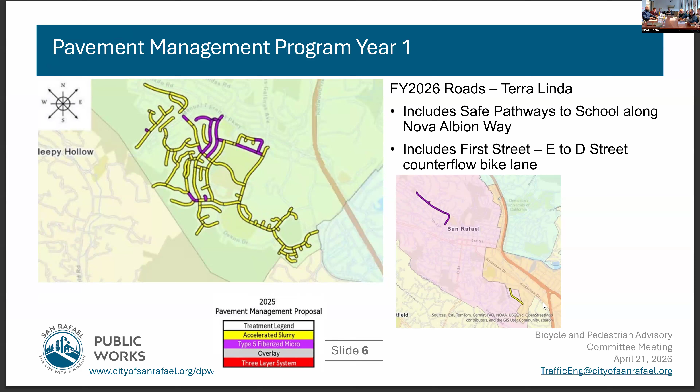So primarily in the Terra Linda area, with an accelerated slurry and a micro. It includes the Safe Pathways to School along Nova Albion. This is a grant that the city received. And then it also includes First Street, E to D, which is a counterflow bike lane, which was in the 2018 citywide bike and ped plan. So we'll go into more detail.

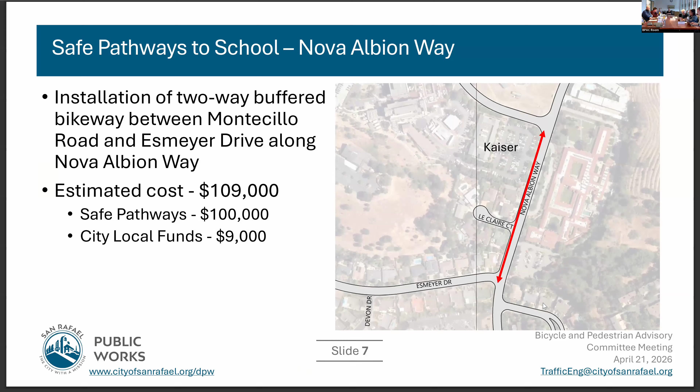So Safe Pathways to School, this is Nova Albion. So this is between Montecillo Road and Esmeyer Drive along Nova Albion Way, right by the Kaiser. Estimated construction cost is right around 109. Safe Pathways is providing $100,000 of that, and the city is matching local funds of $9,000 for construction.

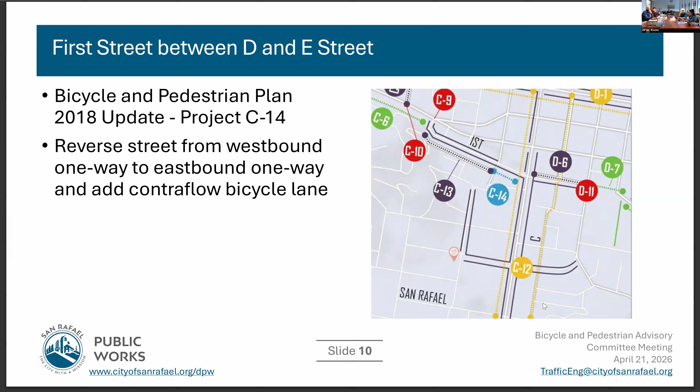And then First Street between D and E, so this is C14. Like I said, this was in the Bike and Ped Plan 2018 update. So this is looking to reverse vehicle traffic from the westbound direction to the eastbound direction towards D Street, and then adding a counterflow bike lane to head back towards E Street. So that's what this looks like, you'll see over on the right.

That is it, happy to take questions. I appreciate that. All right, so first, members, questions of staff.

I don't have any questions. No questions from me on that. Thank you, it's great. We'll open it for public comment.

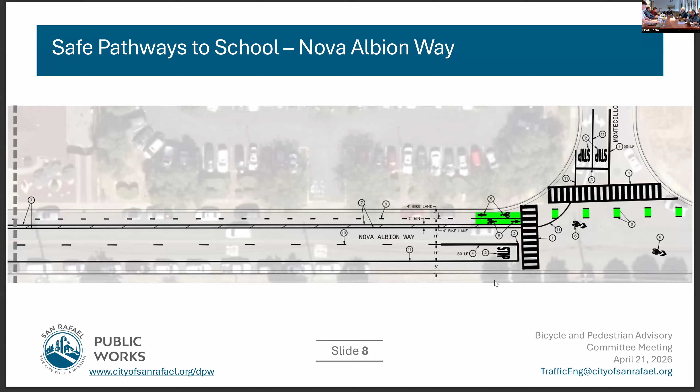And another thing - that section of First Street in the eastbound direction is also a bike route. Can it get some sharrows on the road there? They're not shown. I think there are some existing ones from when we did the paving a year ago, and they might just not be shown because they're existing. This is new striping, but we can confirm if we need to add them for the traffic.

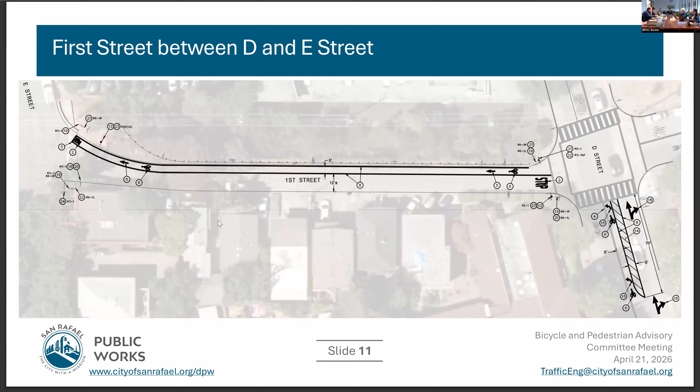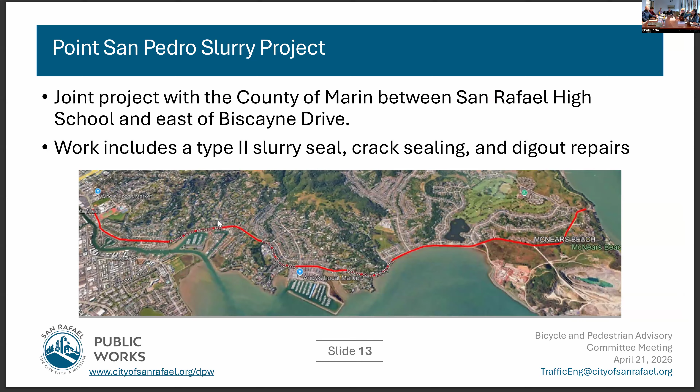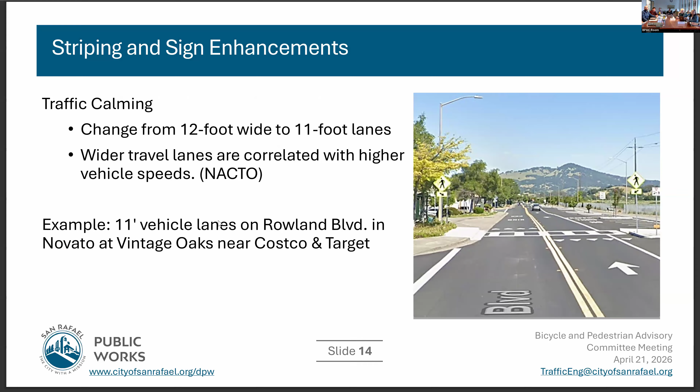Crack sealing and dig-out localized repairs, plus striping and sign enhancements, specifically traffic calming. We're looking to change the existing 12-foot wide lanes down to 11 feet wide. Wider lanes are typically correlated with faster speeds, so we're looking for some reduction there. This is just an example of 11-foot lanes on Rowland Boulevard in Novato, pretty typical, nothing out of the ordinary.

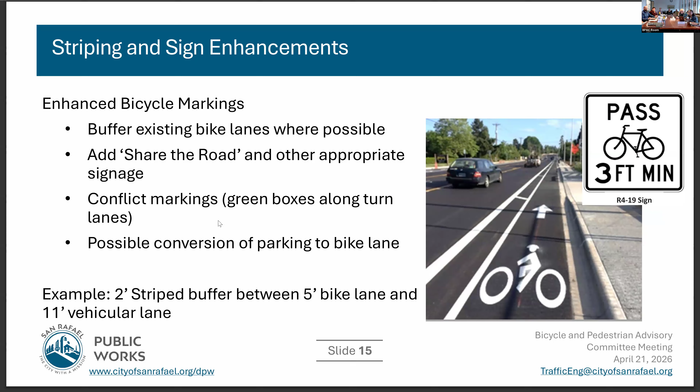And then some enhanced bicycle markings. For the existing bike lane, we're providing a buffer where possible, ranging from 2 to 3 feet currently on the 65% drawings. We're adding share-the-road signage, a minimum 3-foot pass, conflict markings when going past intersections and turn lanes, and looking at possible conversion of existing underutilized parking to a bike lane. This shows a 2-foot striped buffer, 5-foot bike lane, with an 11-foot vehicle lane next to it.

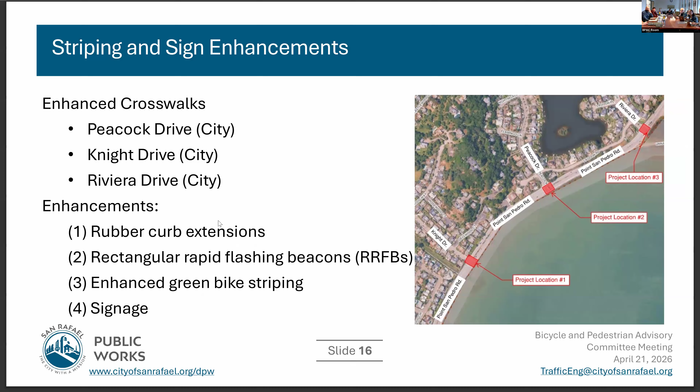We're also doing a quick build project with TDA grant funds, transportation - thank you, TDA. This is at Peacock, Knight, and Riviera. We're doing rubber curb extensions, RRFBs - rectangular rapid flashing beacons - some green bike striping, and additional signage. This first one is Knight Drive at Point San Pedro: rubber curbs to help align the existing curb ramps, enhanced striping for pedestrians, and rectangular rapid flashing beacons on the north, median, and south. These flash when the button is pressed and turn off when it's no longer pressed, plus bike lane conflict markings - the green - through the intersections.

Similar treatments at Peacock Drive, all aligned with the same goal: slow speeds and draw attention to pedestrians making crossings. We're also bringing back some shark-teeth yield crossings to help warn drivers. Riviera gets similar treatments as well, with lanes narrowed from 12 to 11 feet. These are all 65% drawings, so we're looking for feedback from all of you.

May I ask you a question specifically about those, or do you want to get to where it's all done? This is my last slide. Okay, great, we'll get to it.

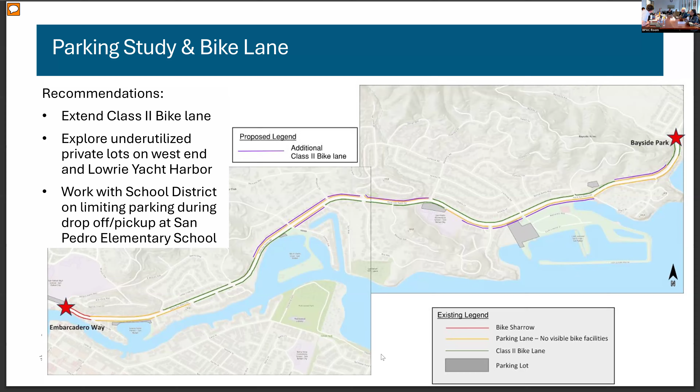Okay, well, maybe we'll come back to that in the discussion piece. Let me open it up for public comment. If we're going to have several comments, it's usually better for each person to speak and then later for staff to address all those comments at once.

Go ahead. Joe Mulligan, the safety director from the Marin Cyclists. I ride on that whole corridor, the Point San Pedro corridor, 4 times a week, so I'm very intimate with that whole corridor.

So the proposed striping and signage enhancements are helpful, and the traffic calming measures are much appreciated, but they still leave cyclists at risk of suffering killings and serious injuries, because under the current restriping proposal, the 2 lanes on Point San Pedro Road would each be reduced by only 1 foot, leaving only 2 feet for bikes where there are parked cars in the path of cyclists.

Legal bike lanes need a minimum of 4 to 6 feet to be a legal bike lane. I'm talking about just the spots where there are parked cars. I understand there's a 2-foot buffer, but where there's not, there's only 2 feet between the edge line and the parked cars under the spots where you're still not able to remove the parking.

So what happens is that leaves cyclists with 2 dangerous scenarios to choose from. Either they stay to the right of the new edge line and then they're stuck in the door zone of cars that are parked, risking being T-boned by a car door, which is a high KSI risk, or cyclists go to the left of the proposed edge line, cars don't expect it, and the cyclists risk getting hit by cars, or yikes, gravel trucks, which is a higher KSI risk.

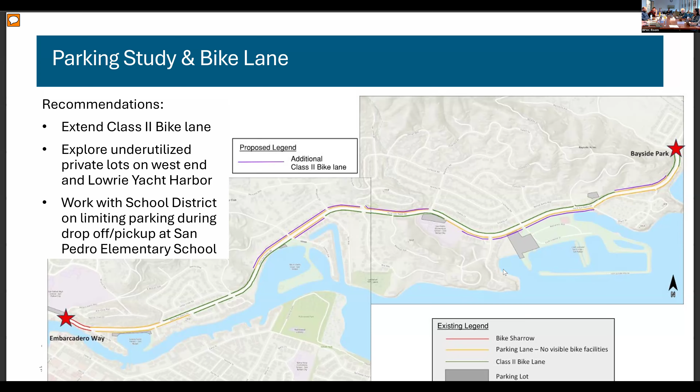Thank you, April. Any further commentary or feedback? Can we go to the intersections also? We talked about the road, but we started with Knight and Riviera. You showed three of them. The middle one, it looked like you sort of squared off the turn corners. Could you go to the other one? This is Knight, this is first, second, and third. Go to that second one.

What's drawn up in that top left corner? What are those? Why don't you have those on the other drawings? They are in other places, so they're here. Those are the 6-inch rubber curbs, black with yellow striping, to help channel cars. So specifically in this case, cars can't cut this corner.

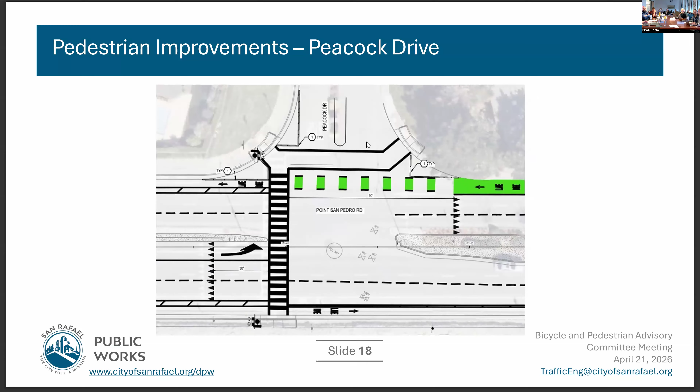Yes, they have to come out and make the right turn up Peacock. Same with Peacock where it points onto San Pedro Road. Coming south on Peacock Drive, you can't cut the corner, you have to come out. I like that feature. It appears to be missing on the other two.

Missing on Knight, in this corner here? Yeah, it's here, but not here. So it seems like that would be an important one on Knight also. Sure, it's the same exact situation as Peacock.

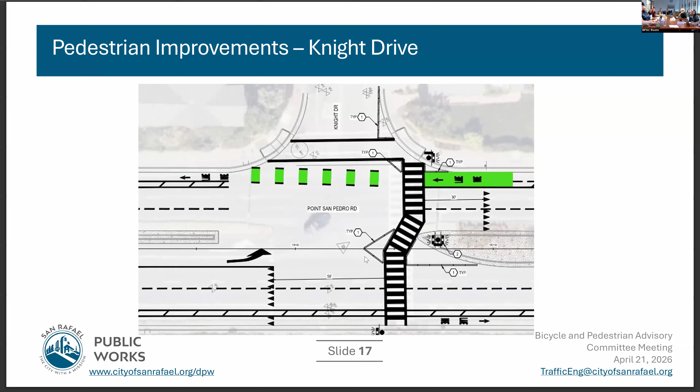And when people ride bikes, that's a common problem - a car coming down Knight and Peacock, all these roads, they start driving into the road before they actually stop. I think that final one was the same, also missing that same thing. I would like to see that. Sure.

Do you think it's reasonable that'll be added in, or is there a reason it's missing? At 65% drawings, whatever the decision was, I'll talk to the designer GHD and ask if there was a reason it's on this side and not on this side. Will we see these again before they're done? I know it has to go quick. It does have to go quick - it's not going to be presented to BPAC, it will go to city council. So that would be a presentation opportunity. Thank you.

Any other questions, comments? No. I'm glad to see the quick build style stuff happening. That's a great approach, and hopefully we'll be able to do a lot more with limited resources. Agree, I know we always strive for the ideal, but this is pretty good. All right, do we have a motion to accept the report? So moved. Second. All in favor?

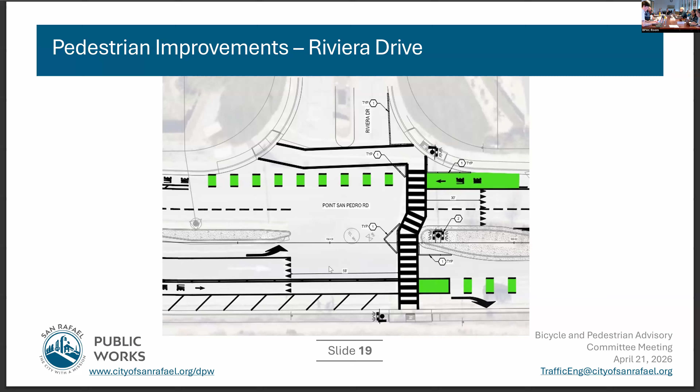Great. So that takes us now to agenda item C, traffic calming policy. This is not me. Good evening. This is the draft traffic calming program policy.

The goal of this program is to address traffic-related concerns such as excessive speeding on residential neighborhood streets, and also effectively manage traffic-related concerns considering benefits and cost of traffic calming measures. This is detailed work with a lot of numbers and percentages, so feel free to ask questions at the end or interrupt me. The principal guideline is the traffic calming program process only applies for neighborhood residential streets. Some of the traffic calming will impact on-street parking as necessary. The other issue is emergency vehicle access has to be maintained. A request for traffic calming tools will be evaluated on a first come, first served basis.

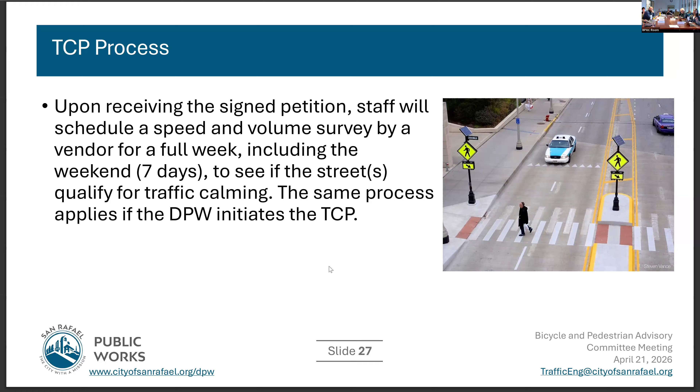Once a residential street qualifies for a traffic control plan by signature petition and we do the survey, here is an important point - what speed they qualify at. To be flexible, we have created different criteria for different speeds.

In general, if the 85th percentile of speed - meaning 85% of cars drive under that speed and 15% above it - is 7 miles per hour over the posted speed, say for a 25 mile per hour posted speed, the 85th percentile would be 32 miles per hour, only for 4 hours of any day of the week, then they qualify. So that means 7 miles per hour over.

If 85% is over 5 miles of posted speed, so 30 miles for 6 hours any day, then they also qualify. Or if 85% is at or above 30 miles per hour, which is over 5 miles posted speed for 2 hours of a day, that also qualifies, but this is really the low bar.

This is for streets in front of schools, community centers, and seniors. So we have that first one, which is in general, but it's for 4 hours. The second is more reduced, 5 miles per hour over post, but for longer time, 6 hours. Then also 5 miles per hour for only 2 hours, could be AM peak or PM peak, in front of a school, community center, or park. The reason these criteria are set is if you make it too harsh, most streets won't qualify. If too soft, every residential street would have traffic calming.

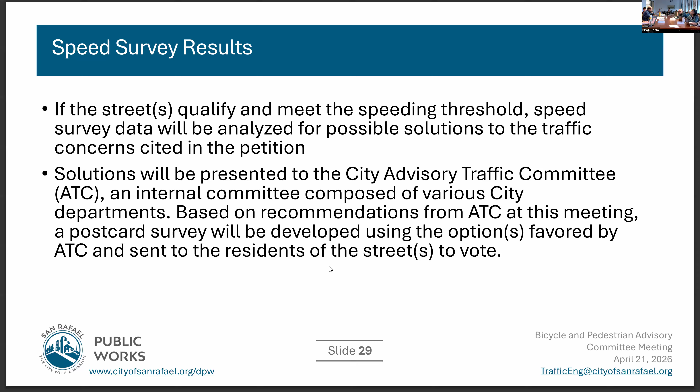So who can vote on which tool has to be implemented once they qualify? This is important because only residents who live on that street, or renters, can vote, or a cul-de-sac that has to take that street. The reason is you don't want to expand it too much, so people who don't live on that street but are just traveling and speeding don't dilute the vote. If you make it too big, nothing will qualify. Only people who live on that street, or have to take it if in a cul-de-sac, have that option.

That's why side street residents who have the option not to take the street cannot vote. Only one vote per property is allowed, and duplicate postcard votes will be discarded and not counted. For tenant and property owner issues, if the tenant and property owner vote the same, we only count one vote. If they vote differently, only the property owner's vote counts.

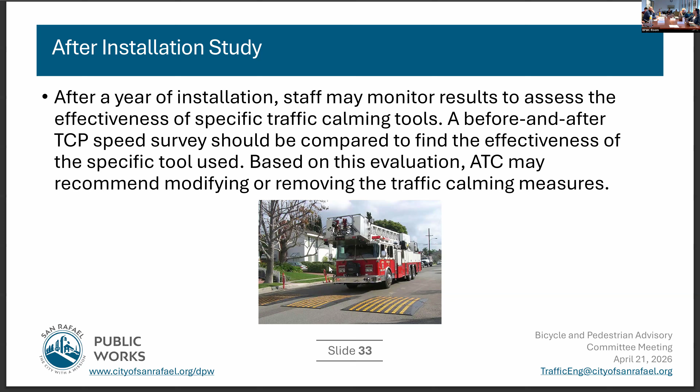Tools and devices that are used - in this example, that's choking the street for a crosswalk in the middle of the mid-block. Speed warning signs are things we can do with SeeClickFix. Curve warning signs and electronic speed radar signs are also expensive, requiring a neighborhood vote. Channelizer and striping is another method.

Narrow median island - that's for when you make a turn and people generally take it wide and go fast, so if you put a narrow median island, they have to slow down. There's also refuge islands, chokers and bulb-outs, and chicanes, which is an island on one side, then a little further another island, and then another island, kind of blocking and at least giving the speeder an impression that the street is narrow and they should slow down.

Lowering the speed limit to 20 miles per hour, if AB 43 is applicable - some areas qualify, generally business districts, but in some residential streets it also qualifies for 20 miles per hour, especially where there's a lot of bicyclists and pedestrians present.

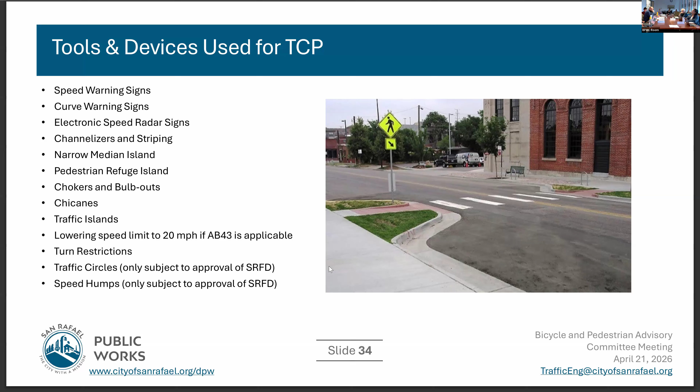If a street does not qualify for traffic calming - either people didn't sign the petition, or the speed survey showed they don't qualify because the speed doesn't exist based on the survey - then they have to wait 2 years to apply again. We don't want them reapplying 6 months later if they don't qualify.

The Public Works Director may remove or modify any installed traffic calming measure for public safety reasons without additional action. So when it comes to safety, the Public Works Director has authority to install it - it was one of the questions we had, that when it's safety, it shouldn't be subject to a vote, but yes, safety issues are very, very different.

Residents may also request modification or removal of a traffic calming measure as part of a 1-year review process. Following the 1-year review period, residents may follow the voting procedure outlined in the approval. So if you want to remove it after a year, they have to do the same thing - submit a petition that they don't want it, people vote for it, and they remove it.

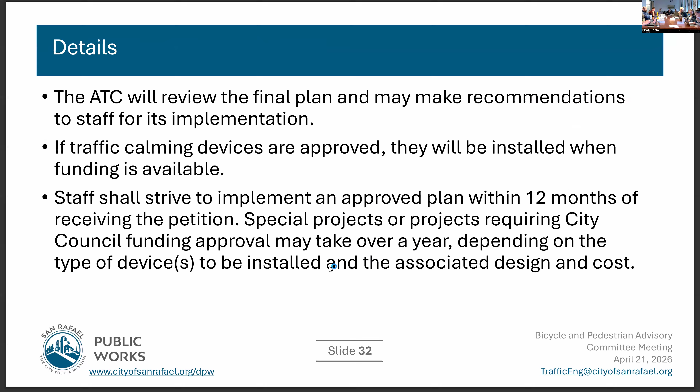That wasn't mine. Could you go back to that slide? We'll want some clarity on that, because that could change the denominator a lot when calculating what's 50% plus 1. I'm thinking of the Canal neighborhood where there's a number of apartment buildings with dozens of units per building, so whether that's 1 or 30 would likely make all the difference whether a petition meets the threshold.

Based on my experience in other cities, one time we did owner-only voting, but it backfired, so I think there's some legal issue there. Well, it's true, clarify it: if there's an apartment building with 30 units and it's just one owner for all of them, how do they get 30 votes, or do they get 1?

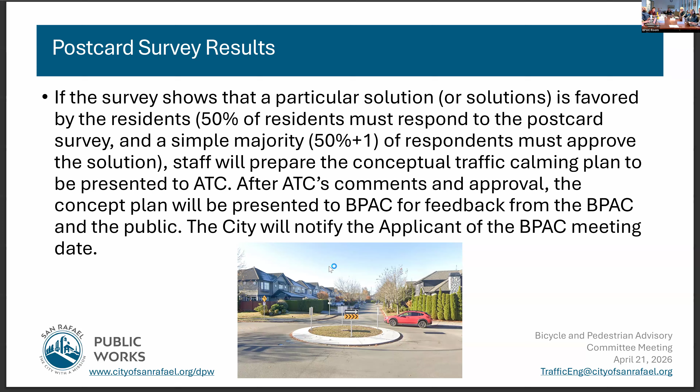Could you go back? There was a slide where you talked about the voting process, because this question relates to that. I found this confusing. It says at the top that only residents can vote, but then the third bullet says if tenants and property owners vote the same, I'm not sure what that means.

So residents, say we have a residential street with single family homes. We're calling it all residents, but when we check to send mailers or surveys, we find there's renters, but there's an owner that lives in some other city or out of state. So we send to both, because we are changing the character of the street. So if the tenants and property owners mean the tenants and property owners for the same house? Same resident, got it.

Another question I had was, in the written draft it indicates there's a budget each year, a traffic calming fund with $150,000 in it, that can be used until depleted. How far does $150,000 go in general?

So it depends on what we do, for example the material we use, if you use rubber, and also the tool we use. Say if you want to use a speed hump, people are mostly interested in striping and everything. Each signage costs 10 to 15,000. If you install 2 or 3 on a street, because we never install just one speed hump, it has to be at least 2, so there goes your $30,000 to $40,000.

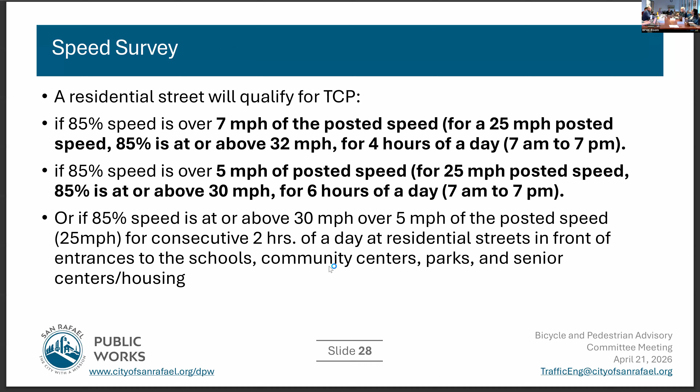It sounds like what you're saying is if there's a collision that triggers staff to investigate, it doesn't go through this process—it's a separate process, right? If it's a safety issue, you don't want the neighbors determining how to address the safety issue.

Yeah, in my report I'm mentioning some of the stuff we have done, and none of it is really traffic calming. We do receive things from SeeClickFix, which is very good because that's the experience of everyday people who drive, and we go in there and validate their concerns. So that's another option. We always check safety, and some of those safety improvements—one project was over $150,000—but again, that's safety, not traffic calming.

I just want to draw attention to this last bullet, at the very beginning—this can be initiated by DPW for corridors that are already part of Safe Routes. So it's initiated, but you'd still do those studies. It makes it sound like it's still part of this process. Yes, still part of the process.

What we'll hear in comments is that 7 miles an hour over is a pretty high bar. I looked comparatively at Davis's policy, which I particularly liked—they had other criteria, and their bar was when the 85th percentile was 3 miles an hour over, that triggered it. Think of narrow mountainous roads—if someone's going 25 miles an hour on your road, they're basically a race car driver on a road that's essentially one big chicane. So it may not necessarily need traffic calming in that no one's driving 32 miles an hour, but the safe speed could still be significantly under 25 despite them not technically speeding. I'd worry we'd miss that if it's so dependent on speed only.

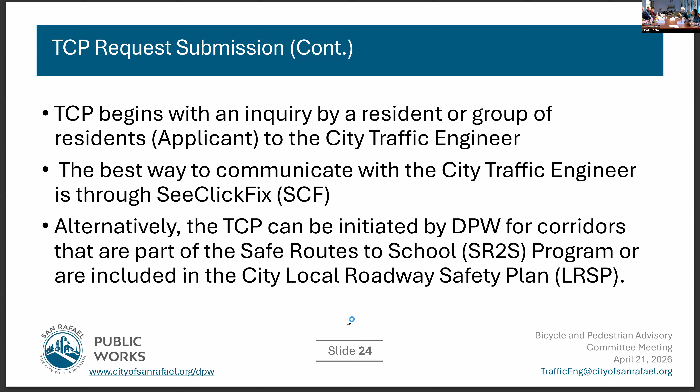Okay, so we can take it back to the committee for commentary on the proposals. I think I would start by saying it would be helpful if you changed the name to something like 'neighborhood traffic calming,' to indicate that it's only for neighborhood streets. Because I know we have arterial streets where we have curb extensions and things like that, and I just want people to know that's not what this is about. So I don't know what the right terminology is, but something to indicate that in the title, so it doesn't talk about these items across the board.

I do think defining what streets are eligible would be helpful. And I guess I also had some concerns - I know you said there's only going to be a few projects a year probably, but the fact that it's all first come, first served, I think there are certain neighborhoods that are more active, more politically savvy, that are more likely to jump out and get a lot of signatures. I would just be concerned that certain neighborhoods wouldn't see the same level of benefit. So I don't know if there's some way it could be more geographically distributed, or limit the number of projects per neighborhood, or look at some other measure about the value of the project - some other criteria, rather than just who opens their mouth more.

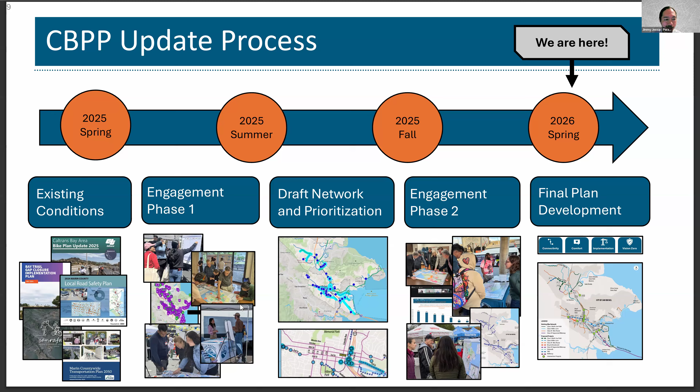On the next slide, I know this isn't visually appealing. There's a lot here and no plan is perfect, but I do want to at least highlight some of the improvements we've made in this 2026 version of the citywide bicycle pedestrian plan. We've tried to elevate the emphasis on pedestrians, putting it on equal footing with the bicycle emphasis that has always existed in the plan.

We've also conducted two rounds of engagement as opposed to one, which had previously been conducted. We've expanded the diversity of engagement offerings, with flexible scheduling for different events. We've shown up at six pop-up events throughout the community. This is the first time we've also offered virtual community meetings in tandem with in-person community meetings, so we've really tried to expand the inclusivity of input that we've received.

We've also really taken a close look and made quite some adjustments to the way that we've prioritized our projects. Of course, prioritization is really what makes the plan implementable. It's what we think shifts the plan from being a document on the shelf to one that is referenced again and again throughout the upcoming period. And so we've tried to increase that emphasis in how we've scored projects.

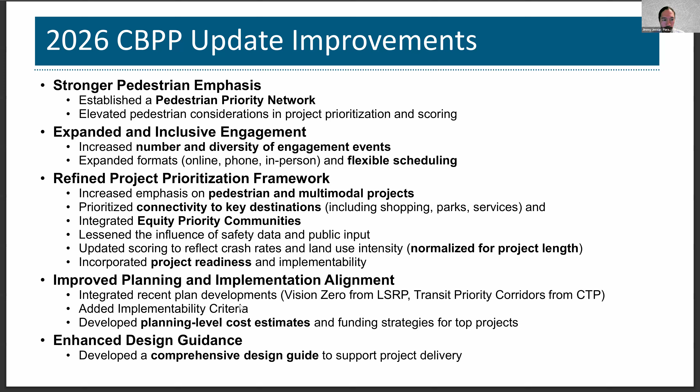And last but not least, to not underemphasize, also for the first time, our plan will contain a design guide, which will be part of the plan and align the way we think about the projects with contextual reference to NACTO, MUTCD, Highway Capacity Manual, Highway Design Manual standards, for ensuring consistent and effective designs for the city going forward.

Okay, so that was a lot. Let's get back into how we're progressing the plan.

Jimmy, we really need you to streamline this a bit. I'm sorry, but we're at hour 2 of this meeting already. I understand. Yeah, a little less detail, please.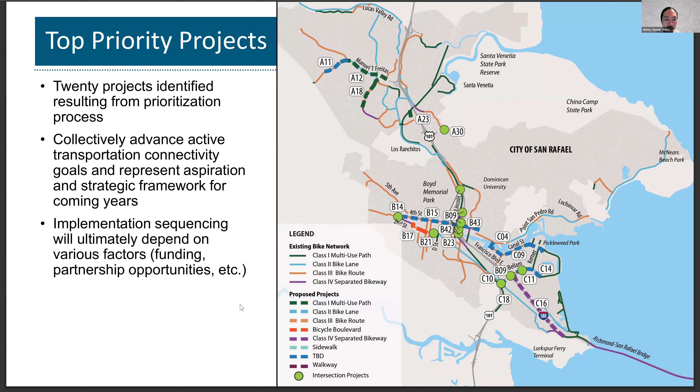We're, of course, here towards the end, and as Kelly mentions, this is in draft form. We're looking to finalize this as we go forward into the summer and have the plan adopted by council, and have this plan implementable and a useful resource for the city to reference and affect real change going forward. Thank you very much.

All right, well, let's try and take our questions first and then reserve commentary for after the public portion. Go ahead, Phil. Hi, Jimmy, it's Phil.

You mentioned that the connectivity was weighted at 45%. Prior to this meeting, we were given a big list of projects and rankings and numbers between each of them, so each one has a little number. I made a little spreadsheet to organize them to find these top projects. Like, I see network completeness, which I would say is connectivity, is 10 points out of a total of 80 or 100 or whatever it could be. Am I looking at the right thing for this list of projects that we looked at?

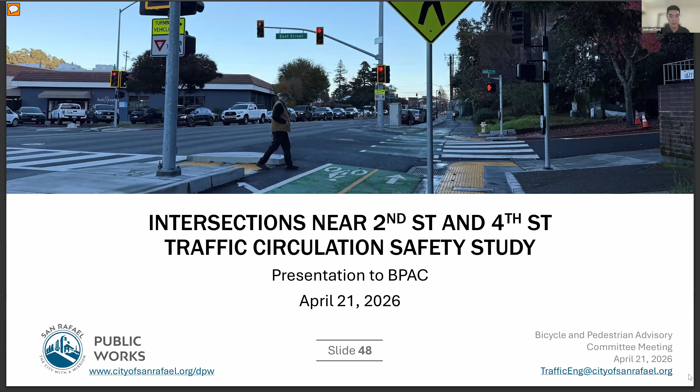Yeah, so this project came about as the city determined that there were some important intersections in the area with several safety challenges, given the mix of street types, the convergence of multiple modes, including the two-way cycle track on 2nd Street, and also some uncontrolled movements.

In addition, there's a project at 2nd and 4th that will close the westbound left turn lane onto Marquard Avenue, shown in the green circle. Instead, left turns are rerouted onto nearby streets that can access the same destinations, shown in the teal circles. So the second and fourth project provided an additional impetus for investigating safety and rerouted volumes.

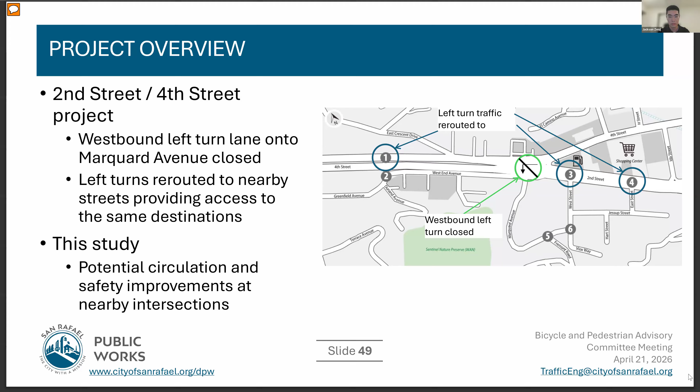This study considered any potential circulation and safety improvement opportunities at the nearby intersections expected to take on this additional rerouted traffic. In this presentation, we'll look at two specific intersections that include the most substantial physical improvements in our list of recommendations. Next slide, please.

All right, so the first intersection is 4th and Greenfield. The diagram on the right shows the existing vehicle volumes in the AM peak hour and also the volumes in the PM peak hour in parentheses. If we just focus on the AM, currently there are a combined 62 vehicles that use that left turn pocket.

That combines both the left turn movement and the U-turn movement as well. With the project, it's anticipated to increase by 22 vehicles, and this represents around a 30% increase in volumes. Similarly, in the PM peak hour, the additional increase is around 40%.

So with this increase, one question we explored was whether the left turn pocket was long enough to take on this additional volume. We ran some traffic analysis and tinkered with the signal timing a bit, and found that if we just prioritize the westbound left turn movement and give it more green time in the cycle, the pocket length seemed to be sufficient according to our analysis.

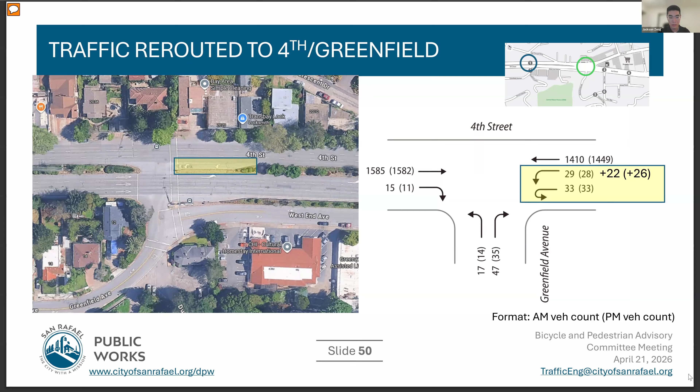The prioritization of the westbound left comes with slightly increased delay for the eastbound through movement, but not substantially. We also had improvement ideas for the area immediately south of the 4th and Greenfield intersection, which is receiving this additional traffic - I'll go into that in the next slide.

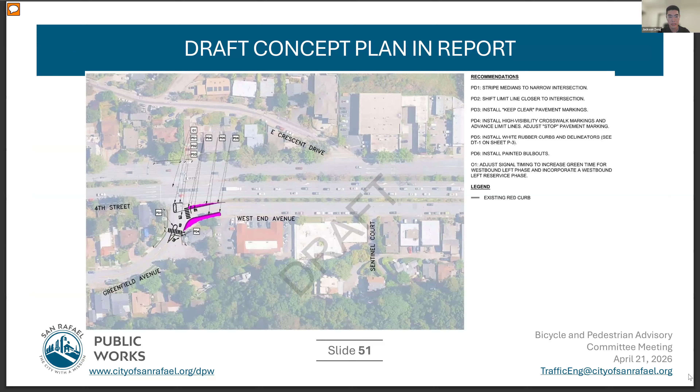This slide shows our draft concept of the area, as shown in our draft report to the city, and we'll zoom in to look at some specific items.

The main thing we noticed was just how much open space was available in this area. So our design really focused on tidying up this space to reduce the street width, clarify the vehicle movements, and shorten pedestrian crossings.

Several ideas we had were striping medians to reduce the street width, adding markings to keep the intersection clear of vehicles, and painting bulb-outs in several locations with curb and delineators. This design assumes the removal of 2 parking spaces on the right corner, right after Greenfield and West End Avenue. We verified our design with turning templates and made sure it works with fire trucks making all turning movements when drawing out these concepts.

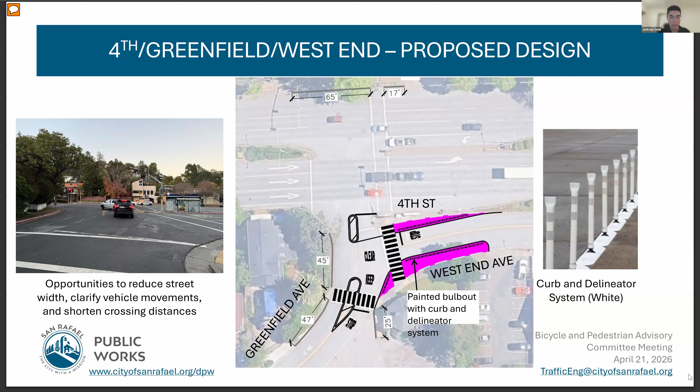At 2nd and West, the main issue we saw was the westbound left turn drivers on 2nd making an uncontrolled movement across what is an existing 2-way cycle track and a crosswalk.

Jackson, we keep losing you, and I don't know if it's us or you. Sorry, can you hear me now? Yeah, okay. All right, I will just keep speaking, but let me know if that happens again.

So at 2nd and West, the main issue was, once again, that left turn movement across an uncontrolled crossing of the cycle track and the crosswalk.

The highlights of our design really focus on slowing down these vehicle turns and increasing awareness of the cycle track and crosswalk. We do that through a hardened center line with curb and delineators.

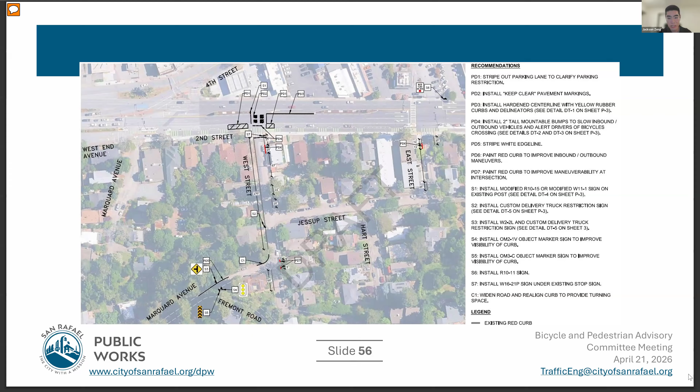All right, well, let's first do questions from the committee.

I guess the only question I had—I thought that idea of the mountable bump was interesting, I haven't seen that before. Do you have any other examples where that's been used, and has that been evaluated at all? I think it's an interesting idea.

Yeah, that idea actually came from NACTO, I believe it's the Urban Street Design Guide. It was shown there as a way of improving uncontrolled left turn and right turn movements across a cycle track. In NACTO they had it as across a crosswalk, but in our case we have the cycle track and the crosswalk.

Okay, no questions from me. Bill? No? Okay, well, let's see if there's any public questions or comments.

Go ahead, sir. I just was wondering if the parametrics analysis agrees with the Kimley Horn analysis that said in April there would be 100 additional vehicles using the 2nd and West access and 200 additional vehicles using the 4th and Greenfield access, because they projected 300 vehicles currently use that left turn lane from 2nd Street to Marquard—divided 100 going to 2nd and West and 200 going to 4th and Greenfield. You were talking about, I don't know, morning, evening. I just wondered if your numbers agree with their numbers.

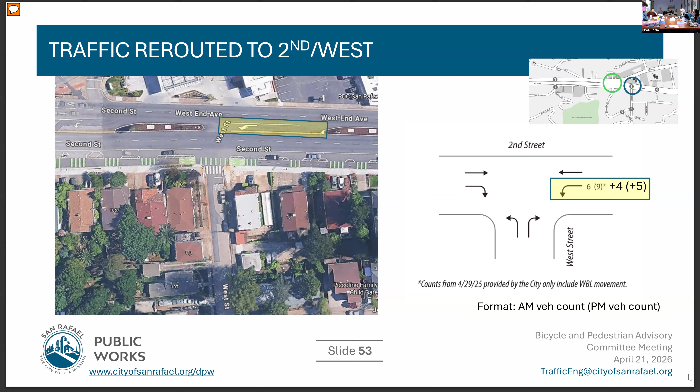Personally, I think the raised bump when turning left from West Street, I like that, for pedestrians coming from either direction. I'm hopeful, since that westbound left turn is immediately near cars coming from the west in an eastbound direction, I assume they'll be held up at the intersection of 2nd and 4th for that signal.

And that will give them a fairly open window to make that left turn and do so safely, taking into account anyone cycling and riding by. If you're talking peak traffic of 15 an hour, that's one car every 4 minutes. So to me that doesn't seem like an undue volume to cross safely, given there'll probably be at least a minute between cycles when there's a red phase on the eastbound traffic and nobody in theory should be coming down 2nd Street. Tell me if I'm oversimplifying that or misunderstanding how the movements would work.

There's a merge lane there, so there's the traffic control at 2nd and 4th, plus the pedestrian improvement and the crosswalk, so it will create a gap. In that gap, for safety, traffic will stop for the pedestrian. That's what I was thinking.

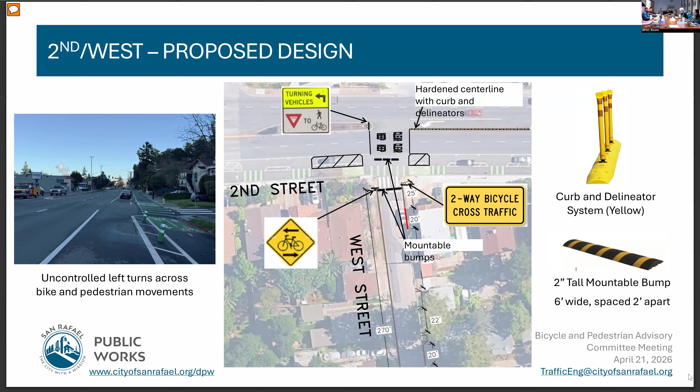Then do we have a motion to accept the report? So moved. All right, all in favor? Thank you, everyone, for your written and oral comments on this. I know it's an issue of a lot of community concern.

Fine, let's turn to, do we have a staff liaison report tonight? Quickly, just to report that, without a lot of advertisement, when the left turn is permissive it's in conflict with pedestrians. This was at the intersection of Manuel Freitas and Las Gallinas, so there was a conflict even making a left turn from Las Gallinas, crossing the crosswalk, which is a long crosswalk and a school crosswalk. The other condition was at Civic Center Drive and North San Pedro, one direction had a protected left turn, but from Civic Center the left turn was going at the same time as pedestrians were crossing. Good catch.

And then another one is at Point San Pedro, Loch Lomond, and Lochinvar. So these are the ones that had left turns where the signal could be modified. We did all three of them with DC Electric, modified the signal timing, and we've gotten positive feedback because now it's protected, the left turn and pedestrian movement with enough time at all three of them.